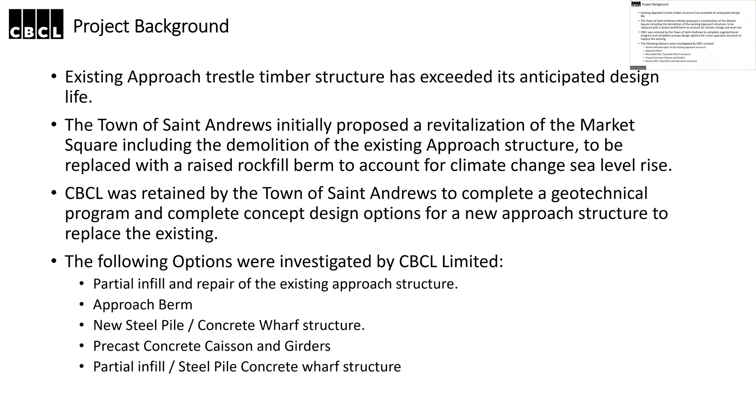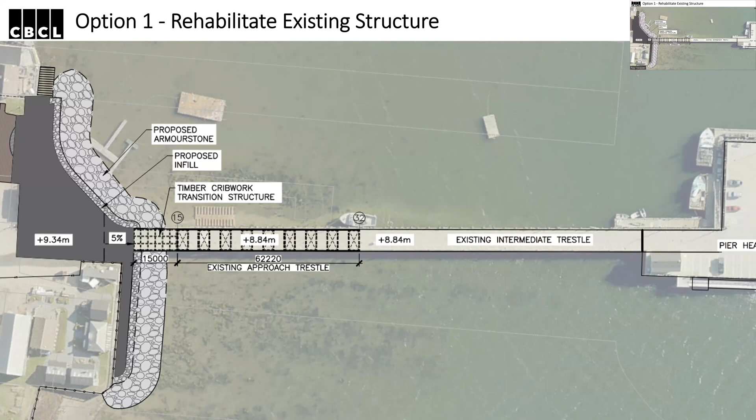The first slide shows the rehabilitation option. Essentially Market Square will be brought up to the new elevation and infilled as per the original plan. We are proposing to demo the first 15 bents of the approach span and the existing timber crib. And we plan on providing a transitional timber crib that'll provide transition between the elevation of Market Square and the existing height of the approach span.

And from that point, we are going to do repairs such as the removal and replacement of the ballast boxes, some deck repairs on the composite timber decking, removal and replacement of 25 piles between grid lines 15 and 32. And yes, I already said the timber crib structure transition from the higher elevation to the existing elevation. So with this, the lifespan isn't as long as the other options.

Any timbers that we're repairing, you can expect a 25-year lifespan. Any remaining timbers will give plus or minus 10 years, could be shorter than that based on doing continual investigations of the wharf. With this as well, your existing approach span will remain as it is, so the higher elevation isn't achieved in this option. But there's potential for access to the intermediate trestle and pier head during construction. There might be short timelines where it'd be shut down by the contractor, but we believe there's potential for limited access during those repairs.

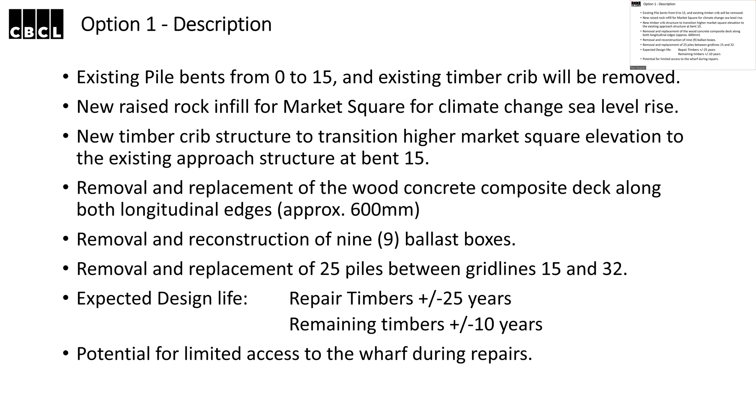The cost, yes. So we estimated the cost to be 5.3 million, 5.367 million, sorry. And this includes all the raised infill for Market Square, modifications to timber bracing on the intermediate trestle, and the pile wrap repairs. We've estimated a construction schedule for this one of 21 months, with the design period taking 7 months and construction taking 14 months. The reason for the long schedule is working with the tides and ripping out the timbers, and just a limited amount of time you have to work in the tidal zone there. So.

Yep, sure. For clarification, councillors, I see they have May 2023 to July 2024. That would probably be May 2024. Yes, sorry, 24 to 25. That's what it should be. My apologies. Yeah, May 2024 to July 2025.

All right, the second option is again extending... Sorry to interrupt. I know we could wait till the end, but I think option by option, it might be good to ask questions versus jump back and forth. And again, we can get into the general specifics after. I guess my first question would be why would we commence a project in May for 14 months and then potentially lose 2 summers at the wharf? If we just put it in January, you know what I mean? Would it be the difference of losing 1 summer versus 1.5?

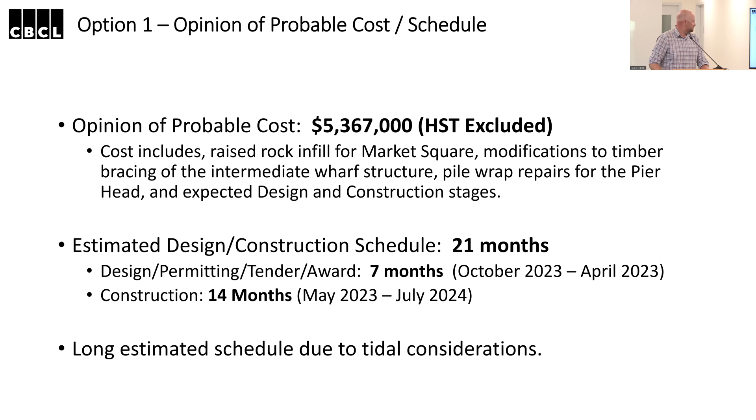Sorry, go ahead. Sorry, I got a little confused, I was talking the infill. But the other thing to realize too, council, is that part of our funding was related to climate change, and I don't think this raises it. It only raises Market Square in a small portion to access the approach trestle. We'd have to get approval from our funding partners whether or not that would be sufficient, because the original plans were to raise the approach by 0.5 meter. In fact,

Thank you. We can jump ahead to the next one. I'm sure there'll be lots of questions at the end.

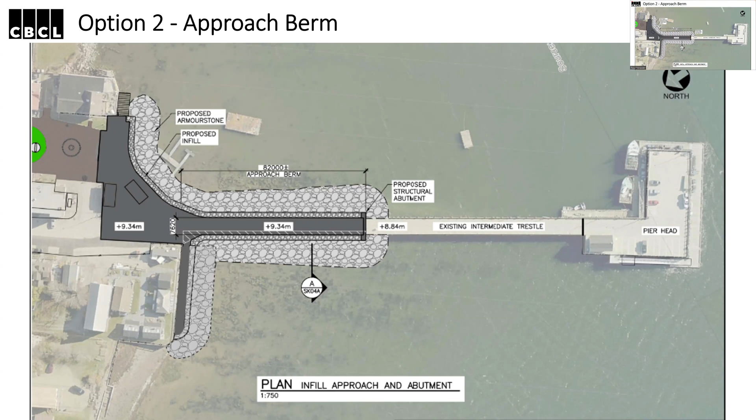So essentially it'd be the removal of the entire approach structure. As I said, the raised infill in Market Square and the approach berm, new abutment. The anticipated design life of this one would be a 50-year design life. It doesn't provide the aesthetics of the timber wharf structures, and it limits the ability to utilize floating wharf structures, but as I understand, they're not really used too much on the approach span. So that might not be too bad of a thing.

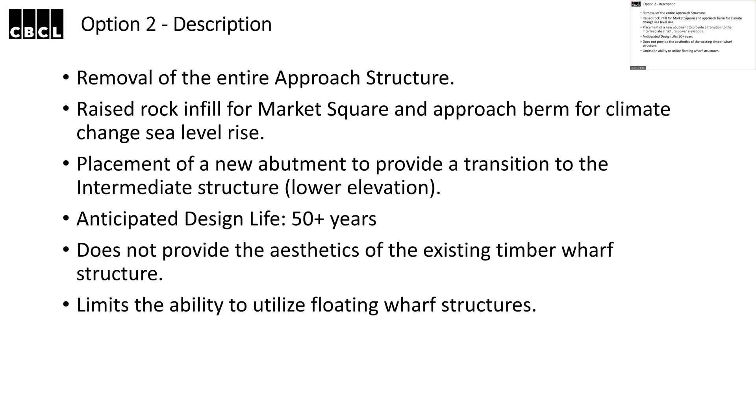So the price on this one we estimated to be 6 million, 6,057,000. And again, that includes the rock infill, modifications, timber bracing, the intermediate trestle and pile wraps. All the options will include the raised Market Square infill and modifications to the bracing and pile wraps. This one is estimated at 12 months overall. Design, permitting, tender and award would be 6 months, mostly concentrated on the permitting aspect. And construction is 6 months. It shows March to September, but we feel this could be done outside of those dates, and we believe it can be started and completed in an off season.

Sorry, I don't mean to interrupt, Corey. The only other thing, council, is that with this, on the wharf and the current approach, there's a timber crib there that some of the boats rest on to do work, and that's going to be lost or have to be relocated. And that was one of the initial concerns from the boating community, the loss of this crib that's about a quarter of the way down the wharf on the left-hand side.

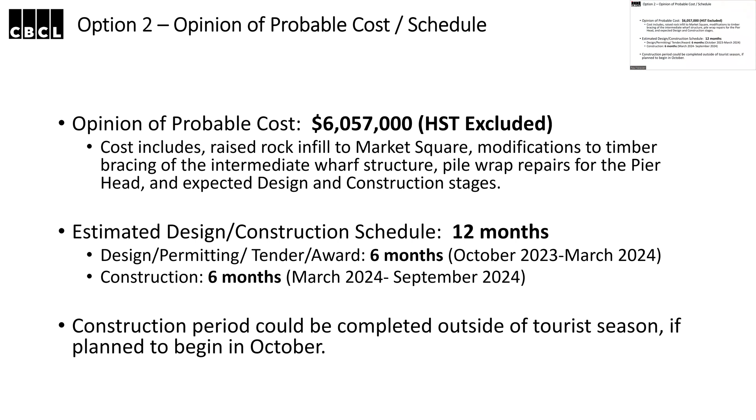The third option that we looked at was providing a new approach wharf structure. It'd be a steel pile supported cast-in-place deck. This won't be as long as the existing approach structure. It'd be 82 meters long, and it would consist of steel pipe piles, some of them battered for lateral loads, and some of them will have to be rock socketed because of that.

Again, this will be raised to the same elevation as the Market Square infill, so that we meet the climate change sea level rise. And then we provide a transition structure from the end of that wharf down to the existing intermediate trestle so that we can transition smoothly. A couple things on this one.

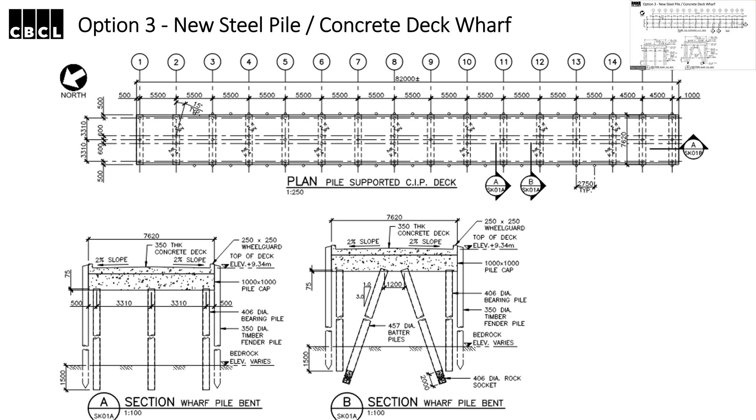Transition spans can be designed for additional weight, for future, if we want to raise other wharves up or do some modifications. This has an anticipated design life of 50 years. We'll also have timber sheathing and timber fender piles on the side of it, so that provides the aesthetic look of the timber wharf.

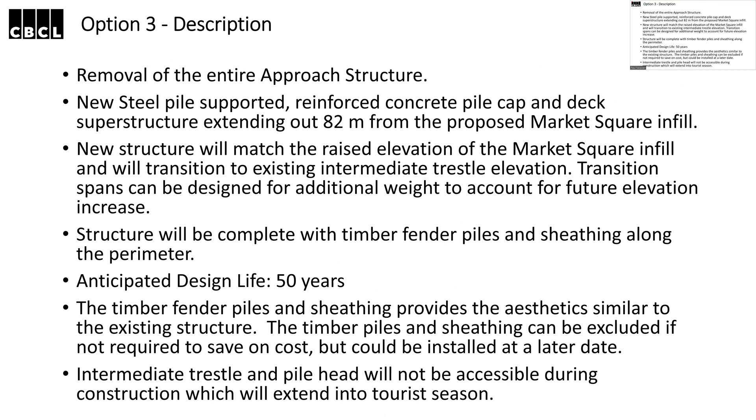Now with this option, we believe that, well, I'll talk about it in the schedule here next. So this option is estimated at 8.2 million, including Market Square, etc. Estimated design construction schedule is 18 months, with design, permitting, tender award 6 months, and the construction season being the full 12 months.

With the construction season, with cast in place concrete, you have to do that concreting in warmer weather. So there's a fair amount of it here. So as we said, we expect a minimum of 1 season would be lost in this option. We just put these dates in there as placeholders, and we added additional time on there for that cold weather concreting.

And council, sorry, I should have put in the conceptual drawings, which you've had in previous reports. This is the one that looks like small pillars holding up almost like a bridge structure. It's concrete on steel, but it has to be cast in place, meaning the concrete's actually poured live here as opposed to being brought in already assembled and just lifted into place.

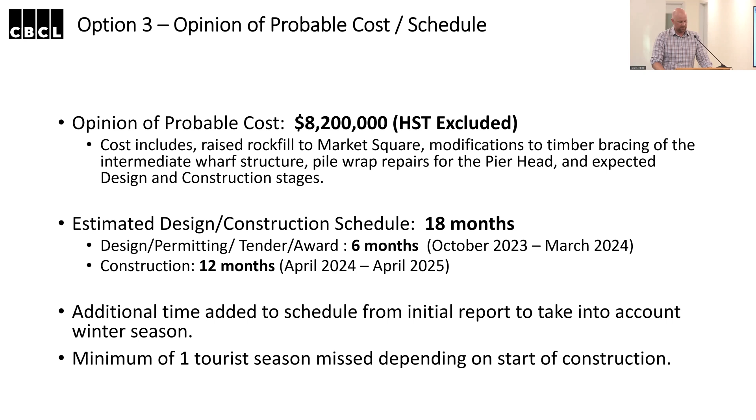There are some flexibilities with some of these pile structures where you can put precast panels down as a deck, but you'd still need a topping slab. So you're still into cast in place concrete, which is something similar to the next option. Are there any questions on option 3?

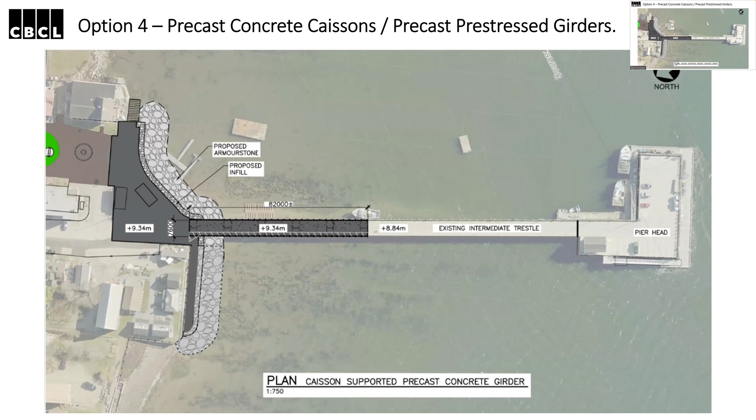All right, the fourth option we looked at is precast concrete caissons with precast pre-stressed bridge girders. Essentially, it's a block and span type structure where we'd have precast caisson units brought in. Their weights would be low enough that they can haul them on the roads. You prepare mattresses underneath them, stack them and fill them with ballast. Similar to a timber crib structure, only with concrete and in sections.

And then the top of the deck would consist of double T precast deck girders. They're typically used in bridge designs. We've used them once in a cruise ship berth design, where we utilized the deck beams supported on pile structures. So with this option, you'd have to land the deck girders onto these precast caissons, and you'd have a topping slab poured over top of them.

So again, this would consist of the removal of the entire approach structure, replaced with this block and span structure that is 82 meters long, same as the pile structure. Wharf elevations would be matching the Market Square infill for climate change sea level rise, and its anticipated design life is 50 years.

We could also include timber fender piles and sheathing into this one to get that aesthetic look of a timber wharf. I just noted in the slideshow that to save on cost, they can be removed from the design, but added in at a later date if needed. A couple of things with this: a little bit more uncertainty with the crane requirements. We have some crane costs in our estimate, but it's a fair size crane that we need to bring in here, so the cost of renting the crane is quite variable.

The stacked precast concrete units are not common for piers or marine structures. We've seen them stacked as retaining structures. They're not common for pier structures. They can be used for that, but they may pose some difficulties, some learning curves, when setting them on the mattresses.

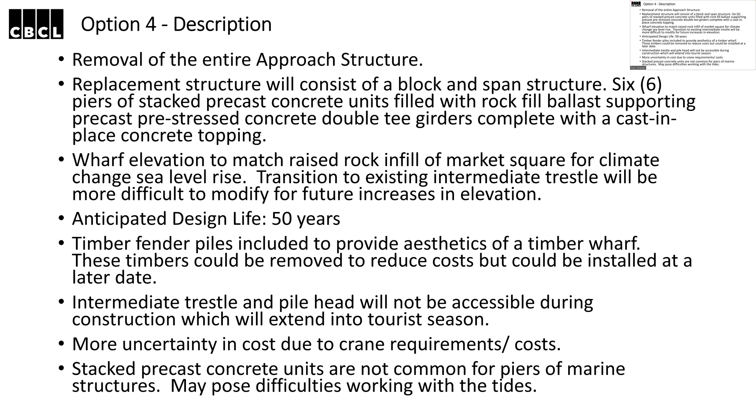So this option is close to the piled option, 7.884 million with everything included. And we have the same estimated construction schedule. Although they can precast the concrete in a plant and bring it to site, there still are topping slabs and more concrete that has to be poured between the deck beams to form the whole structure. So again, for this option, we're looking at one season being missed on the wharf.

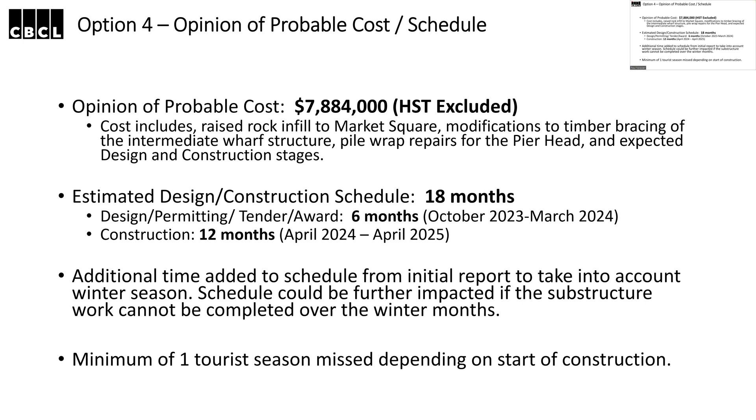And the fifth option, if there's no questions on option 4, the fifth option is the hybrid between the steel pipe pile and the infill berm. So what we're proposing is that we cut down the steel pipe pile wharf that we proposed in option 3 down to 40 meters and make up the difference with an approach berm. In this option, we've extended the plan view of Market Square out more than the other options to allow for more room for shops on there.

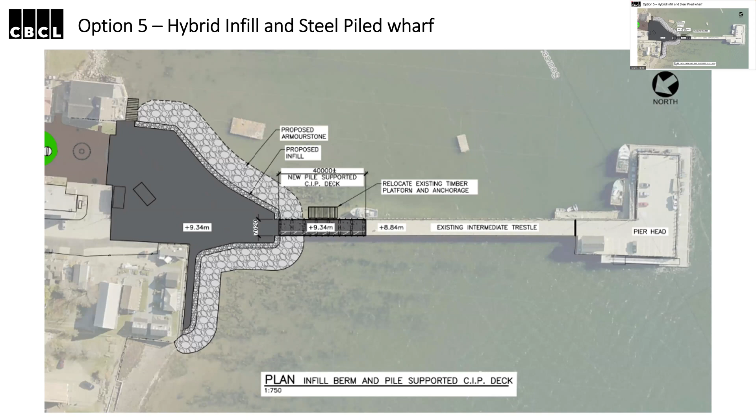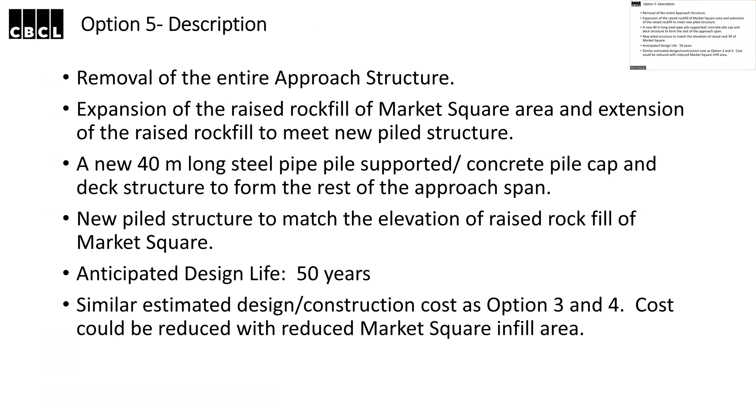We can modify that as needed in detailed design if we were to go to this one, but essentially it consists of the same type of construction as the previous options with steel pipe pile, some of them rock socketed in, timber fender piles and sheathing on the outside for that aesthetic look. Has a 50-year design life. And as I said, the cost could be reduced a bit with Market Square infill. So for this option, we estimated around 7.8 million, including the upgrades and expansion of the Market Square area.

Estimated construction schedule is 13 months with 6 months for design, permitting, tender. All of them are pretty much the same just because of the permitting period. And construction 7 months. So we feel that there's a potential to complete the construction of this one outside of a tourist season, if the construction started right in September. So you'd get your piles driven and your pile caps poured, and then you'd pour the deck in March, April when the weather warmed up again.

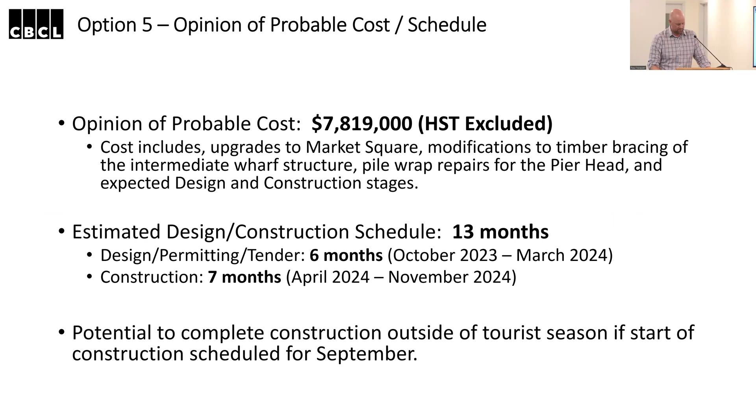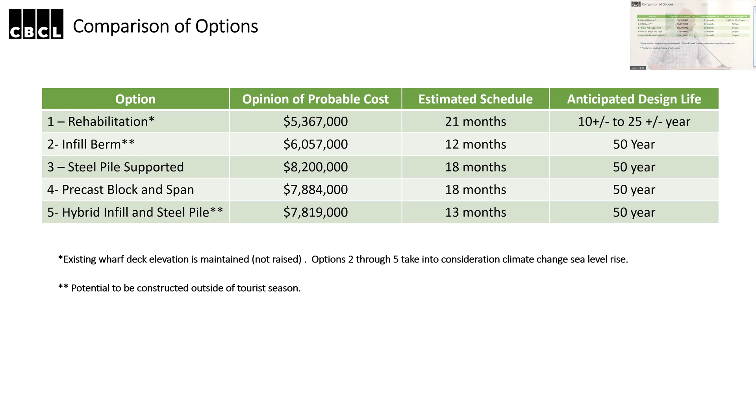And the last slide I have on here is just a comparison of all the options that we presented, and I have asterisks beside a couple of them. The single asterisk is showing that it doesn't meet the elevation for climate change sea level rise. That's the rehabilitation of the existing approach span, and the ones with the 2 asterisks are the ones that we feel can be completed outside of a tourist season. Wouldn't have to take away from any of the tourist season. So that's my presentation. Sorry for stumbling through some of it.

Thank you very much. Appreciate that. Council, any questions? Okay, Councillor Heenan.

Well, if I was to narrow it down, Council and Your Worship, I wouldn't think that we would do number 1 because it doesn't meet the environmental change. It doesn't raise the elevation. So in my opinion, option number 1 would not be looked at. That would just be my opinion. Once again, like last night, I'm no engineer, but I do know that if we're going to spend money, we have to have something in order to address climate change. Thank you. Thank you, Councillor Heenan. Any other member of council?

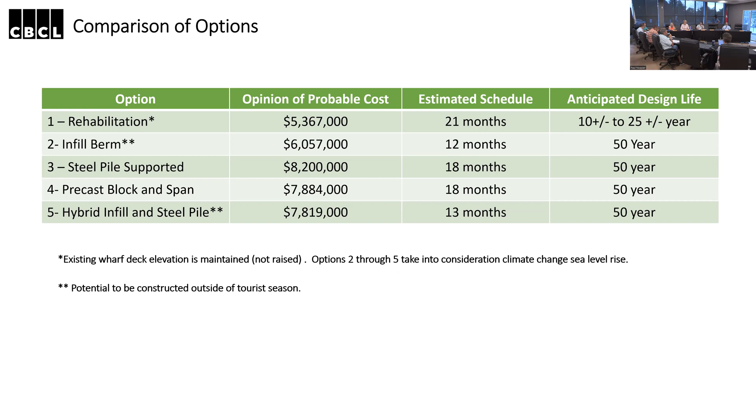All right, the good news about all this, council, is because CBCL is our partner, at any given time should a question surface, we go back and forth. Mr. Spear is in touch with them regularly. There's a lot of questions. I know that the public presentation is scheduled. Is that correct, Mr. Spear? Is CBCL also doing a public presentation in addition? I guess this was about it, your worship. We can do, they'll do whatever we ask. So it's whatever next steps. Well, to a certain extent.

I guess my question is these options, and there's more than what we had last time, haven't been taken out to the public for opinion right now. We might all have opinions, but they haven't been properly vetted. So what does that process look like for the public? Because when you're making a decision, whether it be $5.4 million, which, I get your comments, Councillor Heenan, especially for something that needed a few million dollars in 8 years, it's pretty concerning. But when you have a decision that's 8.2 million and involves maybe shutting down the wharf for an entire year, that needs to be vetted as well, right? So where does that leave us for next steps on public consultation?

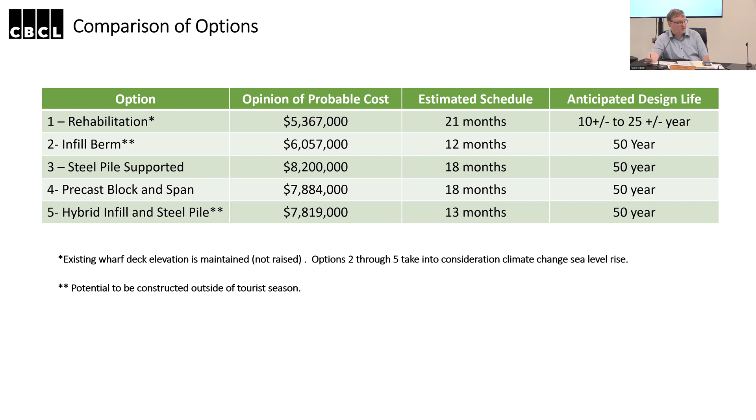Well, your worship, I guess one thing is all these things have been presented to the public, although it's been spanned over about 1.5 to 2 years. I get that, but they all have been. We had several presentations, maybe just after the pandemic, on these.

Nonetheless, what I would suggest is that we do some stakeholder engagements initially. So for the wharf users, being both the commercial and the pleasure boaters, just to kind of get their feeling on the seasonal. And then if council wants, we could talk at a BIA meeting about the tourism aspect. Because in addition to the loss of the wharf, there's going to be traffic, obviously trucks and stuff running up and down the streets through the summer for some of these proposals.

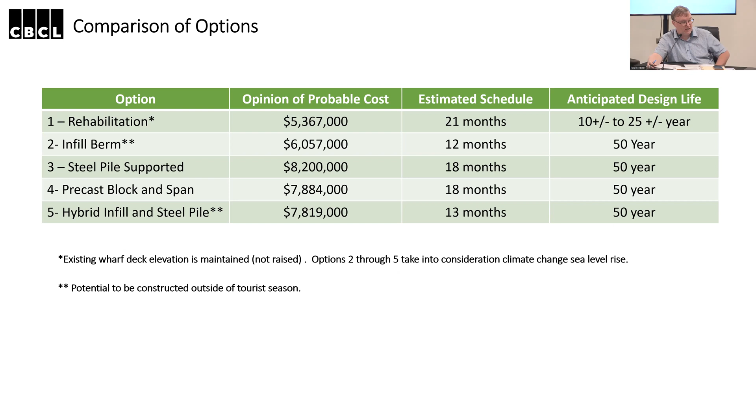And really the next step is we have the conceptual drawings done. If you want to do one more public presentation where we bring in the conceptual drawings and have an open house concept, from my understanding, aesthetics is important, the timing of the season is important, and cost is important. So you get a three-pronged scale, if you will, and you're trying to balance them out. And we just need input from the community.

And I think for those affected most directly, it'd be nice to have them in a more quiet surrounding than having the whole community. So between now and maybe the second week of October, we'll have those engagements with stakeholders, whether or not you want to do it in a council of the whole or just involve a couple of councillors. And then maybe towards the end of October, we look at a full consultation period early November.

Yeah, so the reason that I think it's important to go back to consultation on this is last time we did this exercise, Chamcook Bayside wasn't paying for this. And now they're paying for this debt. I'm not saying they didn't participate last time, but there might be a lot more engagement now that they've got a big deal of financials behind it and the implications for the long-term community.

So, correct me if I'm wrong, the hybrid infill and steel pile was not something we discussed last time, was it? That hybrid option. I don't think that was ever shown. It might have been really fast, but it's certainly there, because we never came up with any new design options for this. We just pulled the design options that have been in previous reports over the last 1.5 to 2 years and consolidated them for this discussion.

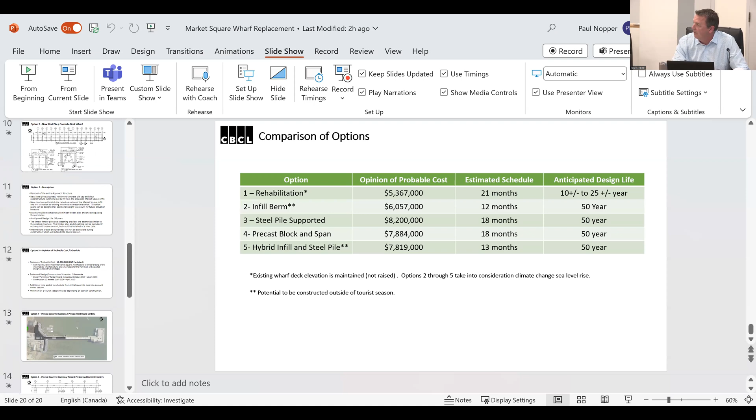I'm just wondering if you could explain, I don't fully understand exactly where the rise happens in Market Square. Are we actually planning to raise Market Square completely, or is it the raised rock wall transitioning from the existing level up to the wharf? So Market Square would be increased to 9.34, this wharf as well, and then the last 3 spans of the wharf will be transitioning back down to the intermediate. But his question is, where does the transitioning start? Just at the rock wall or where the black is?

In here is where we start transitioning to the higher level. Anything that's shaded gray is transitioning up to that 9.34 meter level. Okay, thank you. It goes without saying that transition is going to significantly alter the look of Market Square. Your view of the water is going to be, I'm not saying gone, but a meter rise is quite substantial when you're looking across there, right? So it's sloping down and then going back up again.

Yeah, but we did have approval. We had to give the money back, if you remember, a few months ago, that support to raise the rest of the square, but it's a separate project. So the long-term plan would be to do a phase 2 of Market Square and bring the rest of it up to that level, more or less. And despite the optics, that's not really an option for us. If we don't raise that at some point, it's just all going to be gone anyway, right? So, yeah. Okay. Any other questions?

I guess I should. Okay.

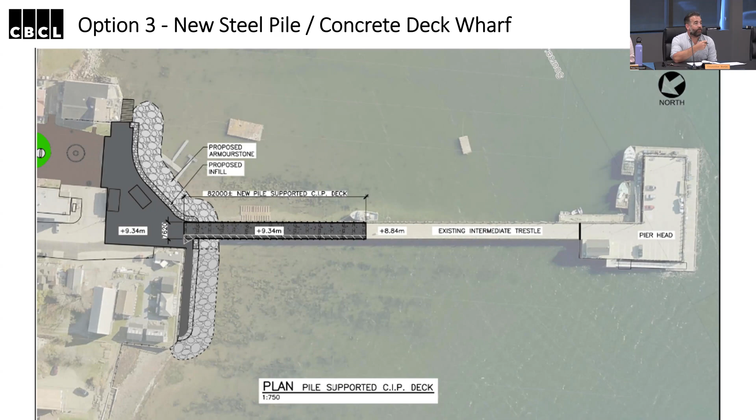Oh, Councillor Hurdle. Since we have engineers here, I'll ask this question for those folks who may not have been down this road before. It might be beneficial to ask the simple question of why can't it just be rebuilt or fixed the way that it is right now? I know option 1 sort of deals with that, but not exactly. So I'll hand it over to you if you can explain for folks who maybe don't understand or see why we just can't have what we have now.

Well, if you build back what you have now, you get a much less anticipated design life. For one, with timber structures, we're usually around the 25-year mark of anticipated design life. Now I know a lot of them go for a long time, but typically we shy away from the timber options just because they don't provide much of a design life compared to these other options with cast-in-place concrete and steel piles and protecting the piles. They'll typically provide 50+ years, especially concrete caissons and whatnot.

They're more robust. So with the timber options, you're not getting as much bang for your buck, in a way, when it comes to design life. And also, if I'm going into a rabbit hole here, the connections start getting very difficult and more expensive, along with the corrosion and the rot and everything. So I understand. I like the look of the timber wharves myself, but we're limited by design life.

Councillor Ware, and then we'll go to Councillor Heenan. What type of timber are you looking at? Have you considered greenheart? And is it still available? I guess it is, at a price. Well, what we typically use, and we usually call up Public Works and other wharves. If it's, say, timber cribs and stuff, we use Douglas fir, treated and everything like that. The treatment these days also doesn't hold up as well as the creosote that we can't use anymore. So typically that's what we use.